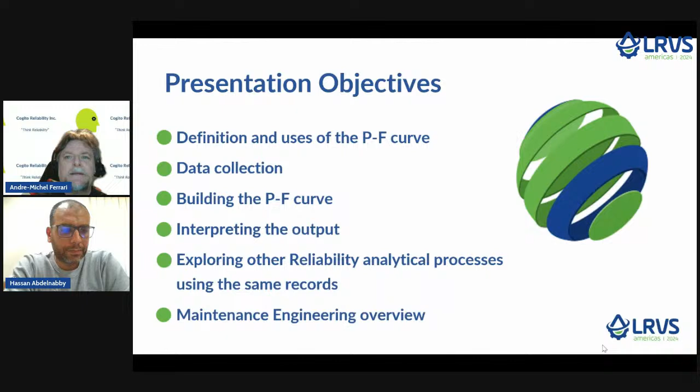In my past career, I've heard a lot about PF curves mentioned here and there, but I never saw how one was constructed. I really like to know what's under the hood before I drive a car. The PF curve is essentially a graph showing specific points corresponding to the health deterioration of a component over its lifetime. It represents the normal process of aging, like for us humans - we age over time, our health deteriorates, and there are specific indications of deterioration we can find over time.

Have you ever heard a doctor say, based on their diagnostic, this particular patient has 5 years left to live? This is essentially what a PF curve does based on a specific diagnosis criteria, for example a vibration spike. Then we can estimate the life before a failure occurs.

In a PF curve, the P stands for potential failure - for example, the bearing is vibrating but still running, but it might fail in the future. F stands for complete failure - the bearing has failed and cannot perform its intended function anymore. The interval between the P and the F is the time we use to plan for mitigation or repairs.

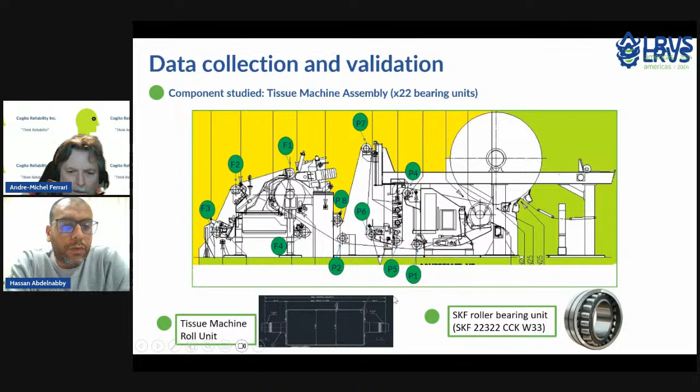In order to make the study as simple as possible, to help us show you how we can build the PF curve, we selected 11 rolls which have identical bearings in type and size. In this study, we will focus only on the bearing defect. Next slide, please.

In our study, we started the machine - the mill started in 2008. We tried to gather reliable and valid data, so we used data from our SAP system, which was implemented in our factory in 2015. We also used the maintenance log to get the F point, the fail point, and we used the vibration analysis program to come out with vibration records that we use to generate the P point. We only used 4 points because they are considered at or above our acceptable threshold.

As for the vibration threshold, we are guided by ISO 10816, currently 20816, and we will talk a little bit more about this in the next slide.

So, vibration analysis of the bearing. The bearing has 4 stages. For us, stage 1 and 2 are very difficult to see actual damage on the bearing - it's all about subsurface cracks. We only consider these 2 stages to make sure the bearing is already available in our store, or we are in progress to purchase the bearing.

We are focused on stage 3. In stage 3, you can see actual damage on the bearing, and you need to remove it before it reaches stage 4, because at stage 4 the behavior of the bearing can be unpredictable and it can fail anytime. Every stage has its own symptoms, and we follow all of that, and also monitor the vibration level to make sure it does not exceed the acceptable level of the ISO.

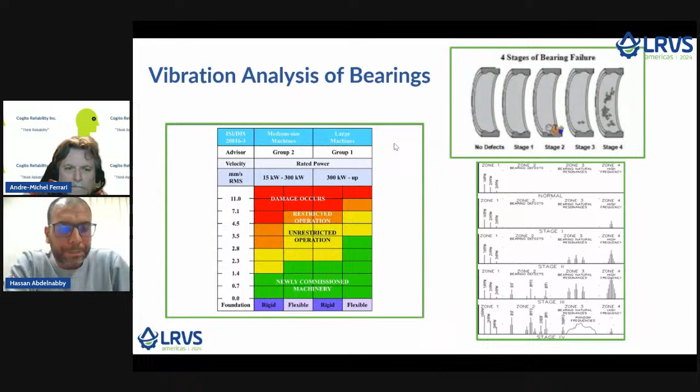Vibration analysis of the bearing is a complex process, but I want to make it as short as possible. We monitor the vibration parameters - acceleration, velocity, or displacement - and see if there is any change in these values. Industry knows that if it increases 20%, you need to look at it in more depth and detail. So if it increases, we look at spectrum analysis and time wave analysis to find the symptom of the bearing defect. All of that helps us build the baseline and set up the alarm level, which helps us reduce the amount of analysis.

Also, if we are in doubt, we compare these values with another similar equipment. All of this is done to make sure that when we say the bearing needs to be changed, we are giving the actual judgment. After all, condition monitoring - vibration analysis is a condition monitoring technique, so we monitor the condition all the time.

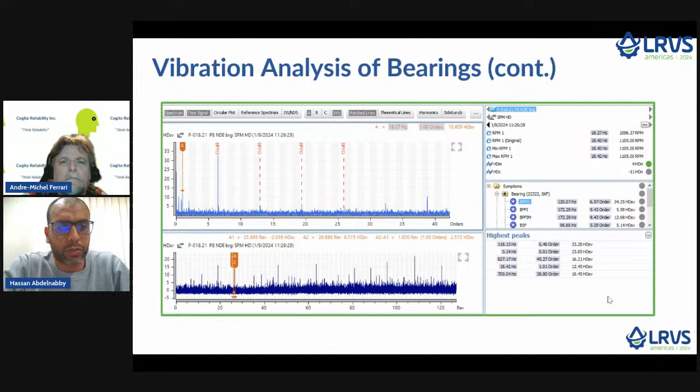This is an actual image of the software we have, but this is a shock pulse technique - another technique we use to give us a pre-warning even before vibration. As you can see, we can detect the bearing failure, and also monitor the change in amount of vibration. We use SPM to give us a pre-warning, because maybe a bearing has a long lead time, and we need to start working on it even earlier than the normal PF curve.

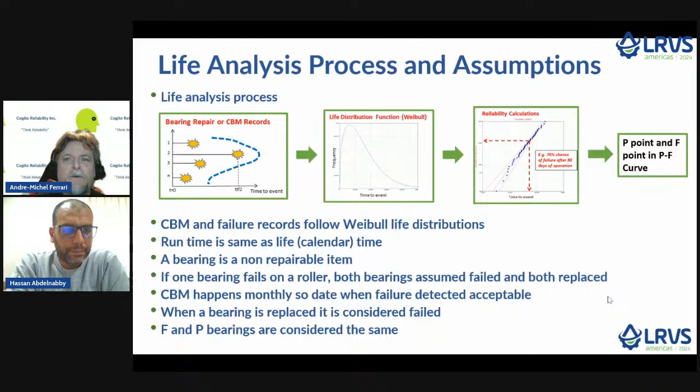Once we have defined this distribution in the middle, we can do various calculations - I put an example here, such as probability of failure in this case. This process will eventually provide us with the P and F points for the PF curve. The assumptions are all listed below, and they are important to ensure that the study is rigorous and well conducted.

Moving on, using this process highlighted earlier, we have literally modeled how a typical SKF bearing in our sample is expected to deteriorate or fail over its lifetime. This slide represents the probability of achieving each point after a specific time interval. We have two sets of data, P and F, so we have two models shown in this slide. We have highlighted in the little box in each graph the Weibull distribution parameters eta and beta, which characterize the distributions for each category. Those parameters are crucial and unique to the model and will help us define the PF point.

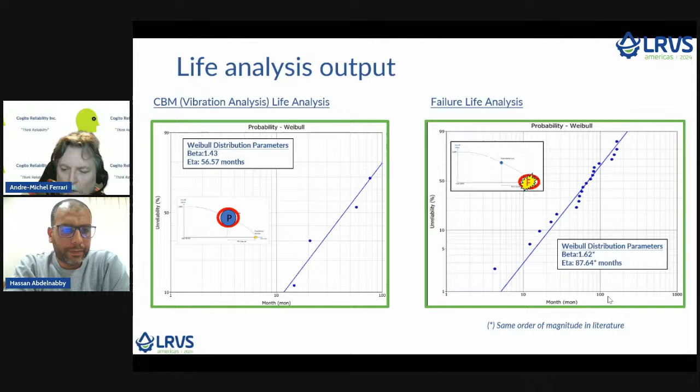Moving on. So finally, here we are. We are ready to build a PF curve. We use the scale parameter, or eta value, which we obtained earlier.

This parameter corresponds to the expected time to see a specific condition of failure. The expected time to see the first P point, where the high vibration threshold is reached, is around 57 months after the new bearing is installed. The expected time to see the failure point, the F point, is around 88 months after installation. The difference between those two points, as shown on the graph, is 31 months, or 2.6 years. This value is your PF interval.

Moving on, let's see how we can interpret the results in a practical way. What does this mean for someone like Hassan, who's going to operate and maintain the equipment? What we get from this study is a PF interval. We did not really focus on the vertical axis, which is the health of the equipment. We focus more on the horizontal part, which is the elapsed time, or lifetime.

We now know that if we hit the P point, we have 31 months to do something about it before the bearing fails. In other words, at the P point the bearing is still functioning, but it is in a degraded state. Nothing has failed yet.

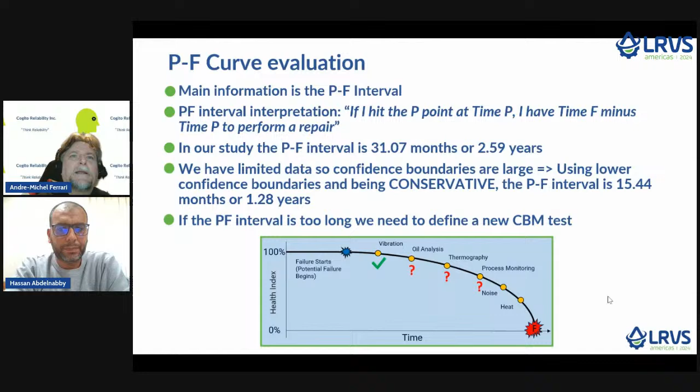Once we have defined this threshold, we would need to gather all the records and timestamps of those threshold occurrences after each bearing installed. The rest is exactly the same. The F point stays the same unless we have new data about failures, and we can refine our model. So moving on, let's look a little bit further in the analysis, it's a busy slide, I'm sorry.

We did all this work, we have all those records, we crunched the numbers, and we got only one value, which is the PF interval. Can we get more from the analysis? The answer is yes, but now we have to throw in another variable, which is cost. That is, money spent doing maintenance or inspections.

Hassan does vibration inspection monthly at a cost of one US dollar per bearing per vibration check. So he does it monthly at a cost of $1. This is low according to North American standards, but this is what it is.

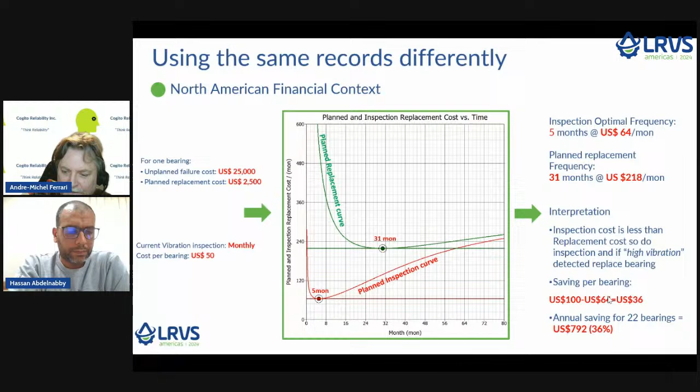Just to conclude here, our PF curve now comes a bit like a Christmas tree where we're adding decorations to it based on the optimized calculations we did on the previous slides. We now add the recommended inspection schedules.

By taking the same data we use to build a PF curve and adding some cost information to it, we are able to refine our maintenance strategy.

I've talked a lot now, but before I pass the microphone back to Hassan, I'd just like to make some concluding remarks on the reliability study. As shown earlier, the PF curve provides good information, but it's limited to the PF interval.

So it would be great to take the same records we used to do the PF curve, and add the cost information to it in order to get an improved maintenance strategy, as we showed earlier. Just a little teaser here with the information we have.

We can even go further and build a reliability block diagram, but that's another presentation for the future. It shows you how reliability engineering can be versatile, beneficial, and fun. We had lots of fun with Hassan.

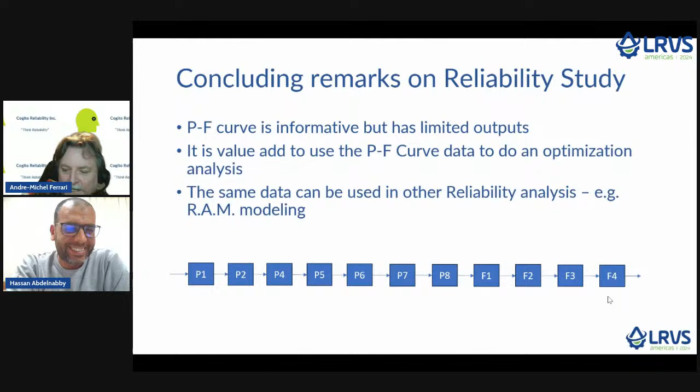Thanks, Andre. So, maintenance engineering review. First of all, you need to monitor your performance. You need to keep record of failure times, mean time between failure, mean time to repair, and machine availability. All of that, you need to analyze your performance in order to find the improvement points in your department.

So, we were able to build our case study because of the availability of data. If we don't have data, we will have nothing, and we will not be able to build anything. So, if you are not keeping record of your maintenance log now, start now.

And if you want to find the correct KPIs that you need to monitor, you can ask your peers in the industry, because every industry has its own KPIs. Of course, you can come to consultants who can help you build your KPIs, but you need to monitor your performance.

As for the PF curve, our conservative approach was 15 months. So 15 months for me as a maintenance engineer is important to have the time to plan the task.

You need the time to determine if the spare part needed is available or not. You also need to locate the resources and the manpower needed to perform this task.

So from my point of view, having a big or long PF interval is essential for correct behavior in your maintenance, because you want to perform all of that under the safety umbrella. If you have more time, you will have better time to plan and get a good result at the end of the day. Which brings us to the last remark on this slide.

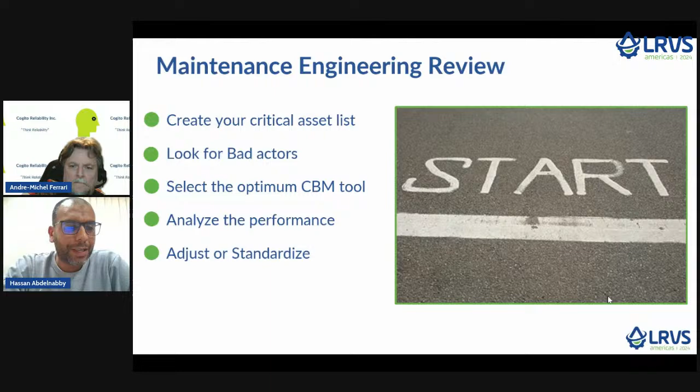So finally, I just want to thank Andre. It was a pleasure to work with you, my friend, and I hope we continue working together. Yeah, so thank you, Hassan.

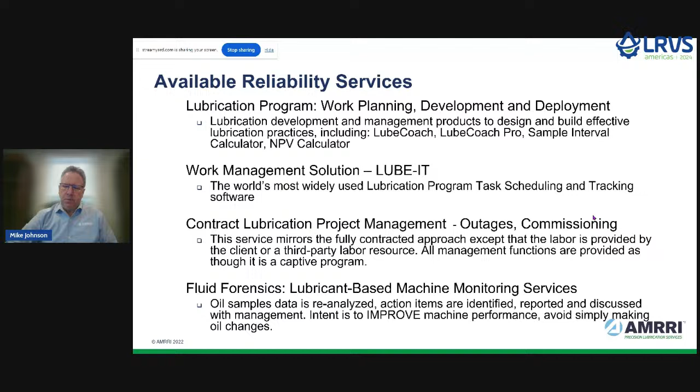We don't do that. Why is machine lubrication considered a pathway to improve financial stability? We've been told by the people that study our bearings and the dynamic film that supports the bearings, that floats the elements in the races, that our industrial world floats on a 10 micron film of oil. The better our research gets, the more we see we're not quite so lucky. The reality is we're floating our element bearings on a 0.5 to 1.5 micron film, and our journal bearings on a 3 to 10 micron thick oil film.

On one hand, that's extraordinary that it works, and it does work. On the other hand, realize we're trying to live our industrial livelihood on an oil film the thickness of a red blood cell. It's a precariously thin layer of protection. We recognize with our day in, day out activities that we have to do whatever's necessary to sustain that red blood cell thick layer of protection in order to protect productive capacity.

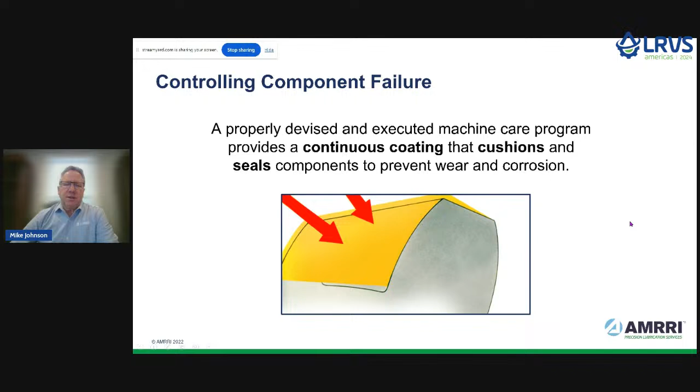If we lose our oil film, all of the effort we put into installation, alignment, and balance is lost. It's gone. So our day in, day out activities should be focused on doing whatever's necessary to preserve that precious oil film. When we lose that film, we suffer wear from surfaces rubbing, wear from contamination, wear debris and atmospheric contamination. Contamination leads to fatigue, we suffer wear from corrosion, and all of those things generate lost productive time.

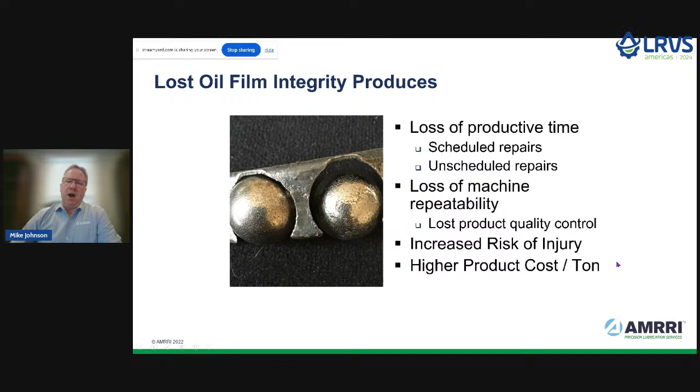And it doesn't really matter whether our repair activities are scheduled or unscheduled — once time is gone, it's gone. We lose machine repeatability, which impacts product quality. We have increased risk of injury, a higher cost of production per unit, whatever it might be, all of which contributes to lost competitive position for our company, for our enterprise.

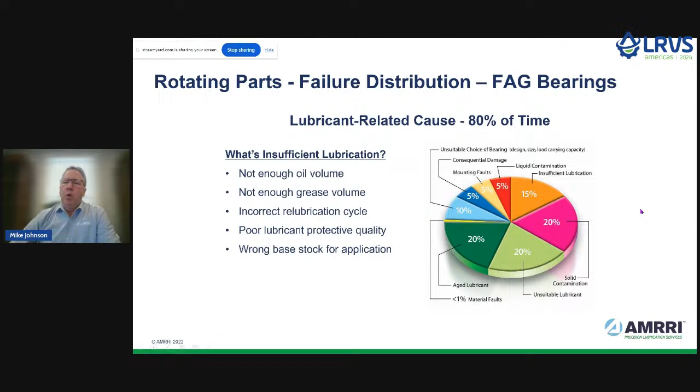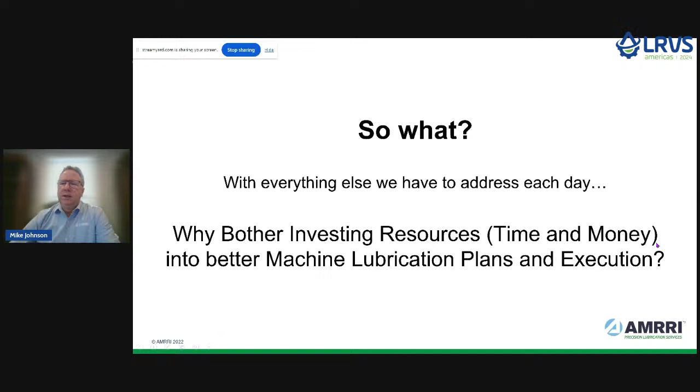So what? With all the things you have to do, why would you bother investing more effort, more money, more time into trying to address something you're already doing, but address it more effectively? Well, time is money. You've all heard that, I'm sure.

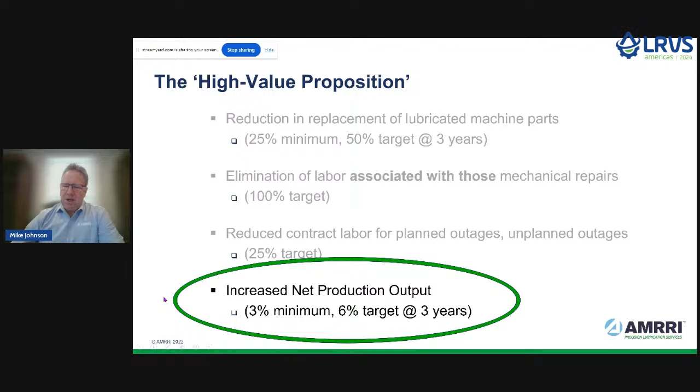What can you expect from deploying a more precise lubrication work plan, precise product selection, precise quantity, precise volume, precise contamination control, precise location? We'd expect reduction in replacement of lubricated machine parts. A reasonable target is 25% reduction, an ambitious target would be 50% in the frequency of repairs over a 3-year period. Elimination of labor associated with those repairs, any contract labor associated with them, and far more importantly, increased net production output. Regardless of the cost incurred to replace machine parts, that dollar value pales in comparison to the potential of increasing production output without adding new production machinery.

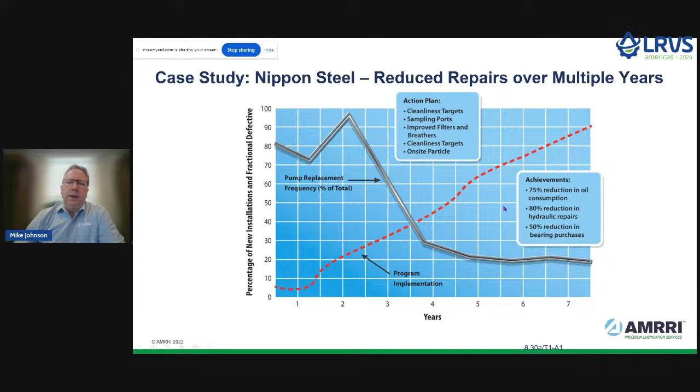Here's a similar chart showing an 8-year progression in pump replacement decline following implementation of contamination control. Another steel mill in Japan showing very similar results over a 5-year period.

I've done multiple cost analyses during benchmarking sessions at multiple facilities, and these numbers, the ROI and estimated savings over progressive years, net present value if you will, always turn out to be larger than expected. That's because our machinery, our livelihood, floats on an oil film that's the thickness of a red blood cell. Anything we can do to improve the effectiveness of that machine-saving film produces huge returns in terms of productivity and reduced cost.

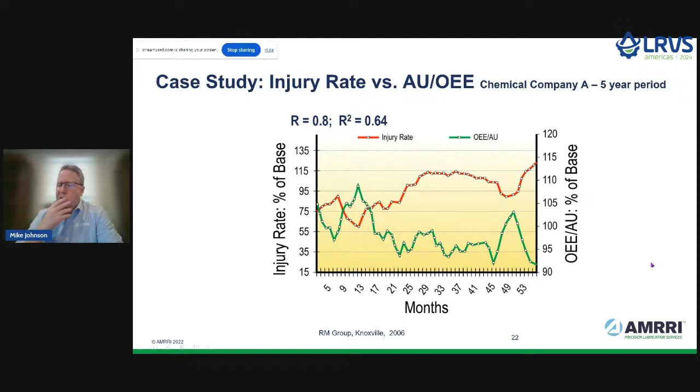There's a safety improvement element as well. Overall equipment effectiveness, an asset utilization measure over a 5-year period. This company showed that as their injury rate increased, their asset utilization decreased. It's a large French chemical company, a pretty healthy study showing a tangible safety benefit, even showing correlations between injury risk and PDM type work orders versus corrective work orders.

There's a lot of reasons we should focus on doing whatever we can to tune our lubrication program up to achieve the best possible outcome: right product, right volume, right frequency, right location, and the right attitude. As it is today, as you look at this presentation, your system, whatever you have in place, is perfectly designed to give you the results you are enjoying or not enjoying today. If you want different results, you have to have a different system.

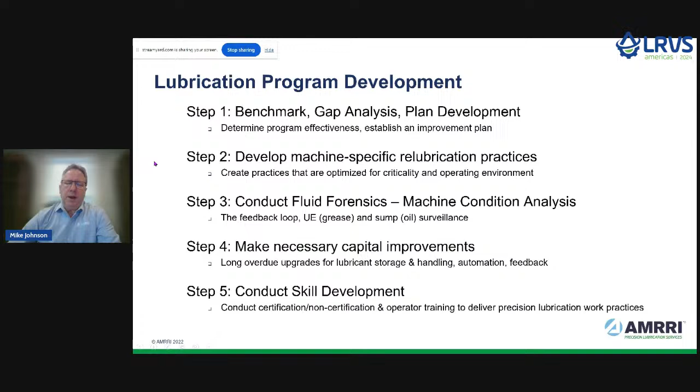So let's think about the system and how we go about achieving improvement in it. There are 5 key steps we would identify as systematic improvement steps. It starts with a hard, cold, objective measure of the current state of affairs as they are today. We often find when doing these benchmarks that customers lack the detail they believe they need and want for their lubrication program improvement activity. So let's focus on that piece.

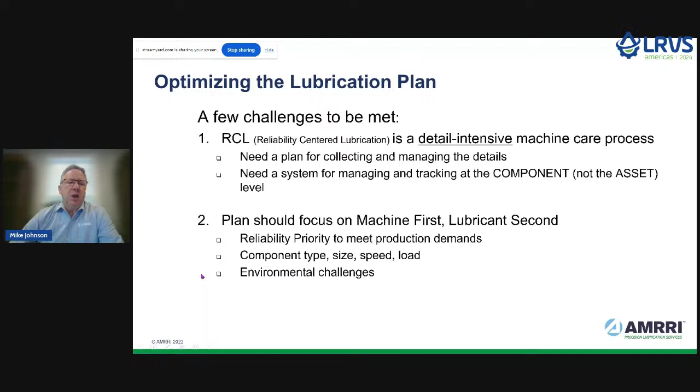A few challenges need to be met when you dig into the many details associated with machine lubrication. Reliability centered lubrication is detail intensive, so you have to have a plan to organize and manage the details. Secondly, we've become accustomed to leaning heavily on our lubricant providers to tell us what the right answers ought to be. But lubricant providers' job is to sell products. Having come from that world many years ago, there's constant pressure to sell another product. That plan focuses on more lubricants in your plant site, where your plan should instead focus on machine reliability, starting with your most critical assets and focusing on those areas that have the most vigorous challenge to operations.

What kind of details do we need to consider? Well, labor is a very important part. We need a thorough understanding of what our weekly labor requirement is going to be, such that we can plan our annual labor requirements. It's not difficult to do this, but it does take having the right details in hand. Consider a critical process pump.

We've got to have a plan for the motor bearing lubrication, drive side and non-drive side, a separate plan for the coupling if there is a lubricated coupling, and a separate plan for the driven machine part. Each component requires a plan, organized so the work can be executed efficiently. We do have software tools, plenty of them, that give us the means to do that.

When considering a critical pump, we need a plan that tells us how much labor will be required for that one pump. If we've got 1,000 pumps, we multiply that annual plan by 1,000 to account for that particular machine type.

So we have 4 visits typically to lubricate the motor over the year, 2 visits to address the coupling, 52 visits for a level check unless we're using automation to control levels. Maybe if it's an important enough pump and we're doing sampling, 4 visits to do samples and 1 visit hypothetically to do an oil change. We could conceivably measure 63 visits by a technician.

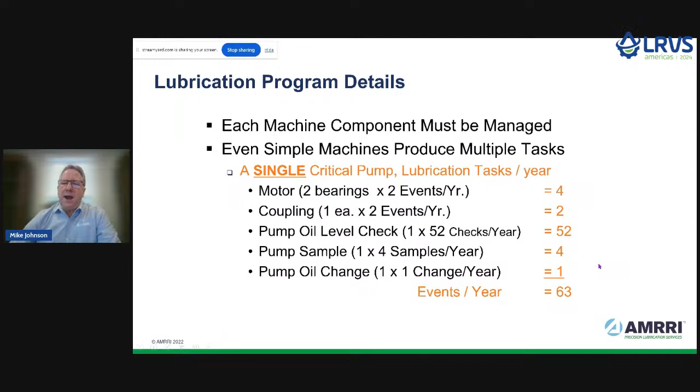We need to timestamp each one of these tasks, multiply out the timestamp per task by the number of visits to give us an annual requirement for that pump. And the same with other machine types.

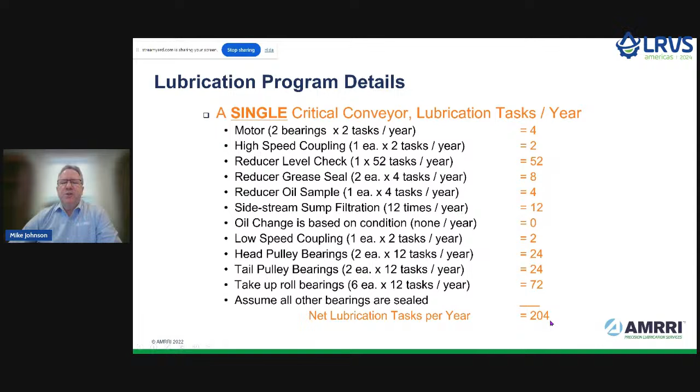A direct coupled fan, for instance, running the same exercise, we may find 30 visits, based upon the size of the bearing supporting the shaft and the speed it's turning—this may be more, this may be less. A critical conveyor has a lot more parts to attend to and a lot more tasks or visits to each component to address the things that must be addressed to float the component's parts.

So we line up all of the tasks. We see that even a relatively small production site produces a very large number of tasks.

We're pretty good at keeping up with the details in our maintenance departments, but at some point you have to concede that a technician or two technicians working together are probably not going to be able to remember 39,422 tasks in a small production cell.

The devil is in the details on our machine lubrication work plans. So to get those details in the right shape, we're going to devise a plan that puts our weekly work activities into routes where each task is addressed.

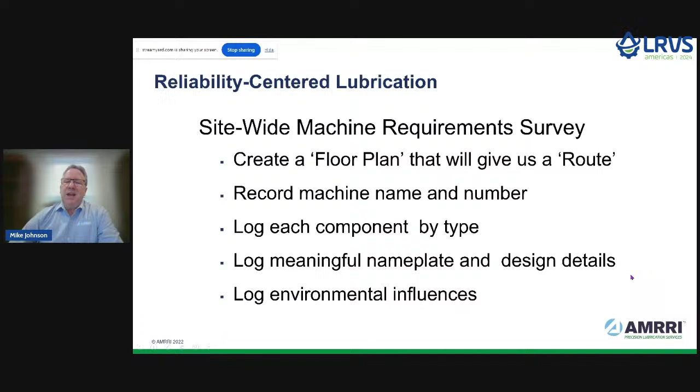We're going to record machine name and number, log the types, any other meaningful design details and environmental influences. You should build a map that shows where all of your assets are with respect to tanks, walls, motor control centers, and what have you.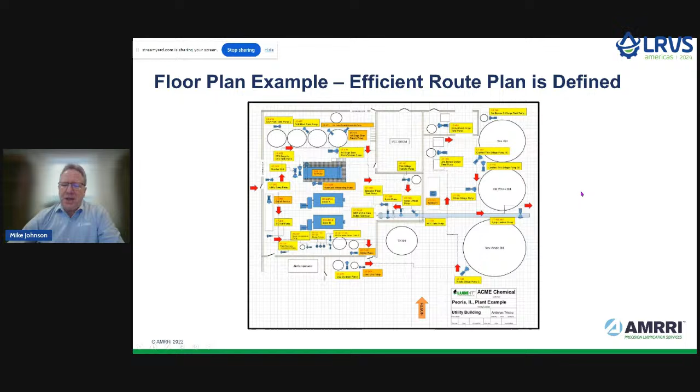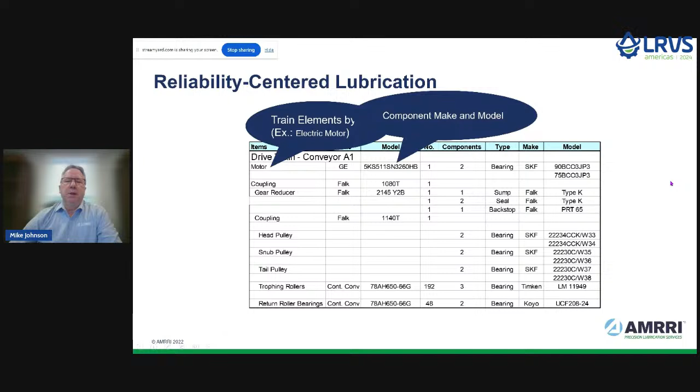This is the route. Once the route is defined, we go back to the machine and record details about the individual components, and there's a lot of details to be recorded: the motor, who made it, the model, the number of motors, the number of components, the fact that it's a bearing, the type of bearing—SKF, ball bearing, deep groove ball bearing—it's noted here, and similar levels of detail for every lubricated machine part.

None of these detail collection bits are complex, but it is time consuming. And if we want a machine lubrication program that supports that red blood cell thick layer of protection, and we want it to be right, we have to have the details in order to build that plan.

The environmental characteristics are also particularly important. The more aggressive the production environment, the more frequently we should be working our inspections and applications.

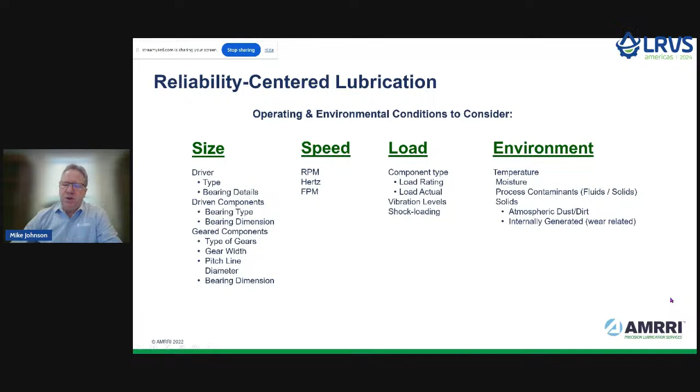The information we're going to use to build this plan comes from a variety of sources, including standardized procedures—ASTM, ISO, DIN standard procedures—and other generally recognized engineering application definitions. Let's take a quick look at what that looks like.

We'll start with bearings, and we'll start with electric motor bearings. Come on, slide—there. We'll start with electric motor bearings.

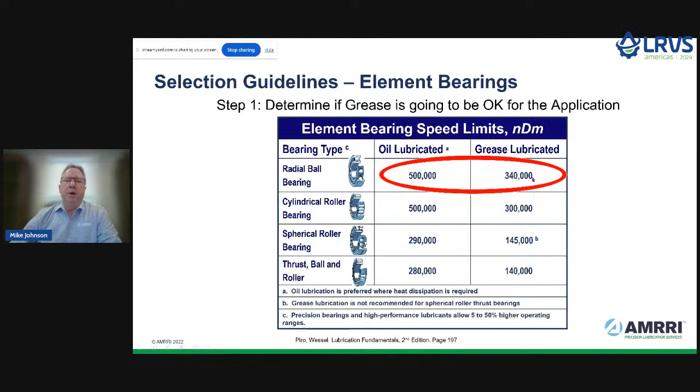We'll look at the nameplate and identify the bearing descriptor number—this is an ISO or DIN standard number. We can identify that it's a ball bearing. We know there is a limit to which grease will function well in a ball bearing, so we're going to figure out whether this particular ball bearing falls above or below this speed. It's a simple calculation.

ID of the bearing plus OD of the bearing, divided by 2, times the shaft speed gives us specific values. Once we know the value, we compare it for the inboard or load side and the non-load side bearing to our limit for grease effectiveness, and we get a straight up answer: grease is going to be a good fit for this component.

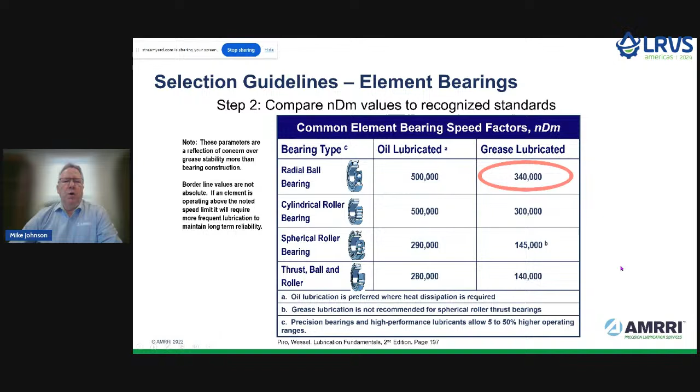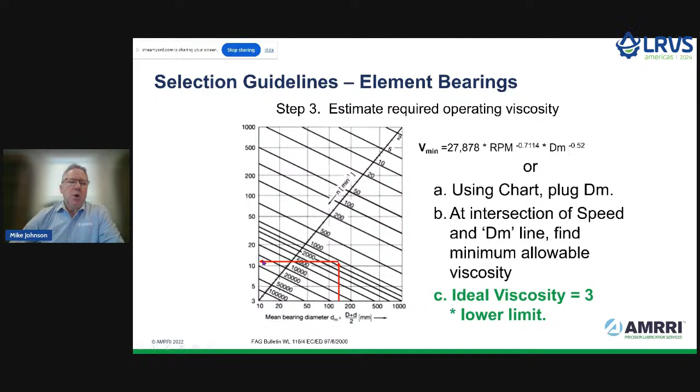The next question is how thick does the oil from the grease need to be at operating temperature to give us the means to float that element? That's a simple calculation. We can either drop the details into a calculator, or go to our bearing manufacturer's lubrication guide and plot the same details onto a chart like this. We come up with a drop dead point, whatever that number, whether it's plotted or calculated, multiplied by 3.

In this instance, for this bearing set, we're looking at a drop dead of 15.2 centistoke viscosity at operating temperature. Multiplied by 3 gives us a target, so we're going to try to find a grease that gets us to 45.6 centistokes at operating temperature. The operating temperature is 50 degrees C. We look at a product that's got an ISO viscosity grade of 100 that we're using on motors at 50 C. That viscosity grade of 100 gives us 60 centistoke of working viscosity. We said we wanted to have 45.6 - that would be ideal. As it turns out, the product we're using would be ideal, and we move on to the next step.

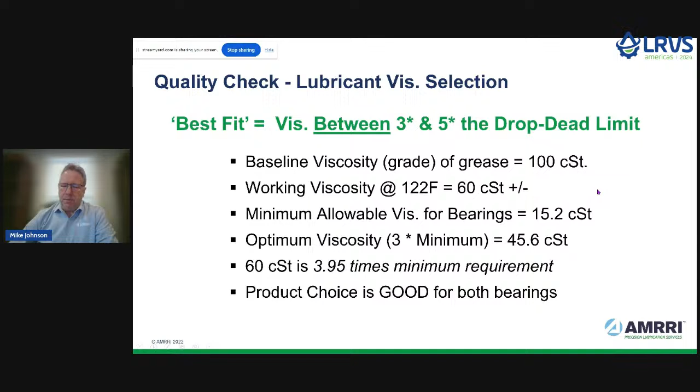When calculating the viscosity requirement, we want to get to a space between 3 and 5 times that drop dead value. That is obviously greatly influenced by the operating temperature of the bearing, so we also need to know the operating temperature of our bearings and other lubricated machine parts when we're designing a program. Step 6 is about lubricant selection.

Bearing manufacturers along the way have said it would be better if you're not using EP formulated products. EP attributes by design are somewhat corrosive, and can particularly attack soft metal surfaces. If we don't need EP formulated greases, we shouldn't use them. The drop dead viscosity value is the break point that tells us whether or not we should use EP products. In this instance, we picked a product that puts us out here just above 3 times the drop dead point, so we don't need EP formulated products to be able to expect to protect the bearing surfaces.

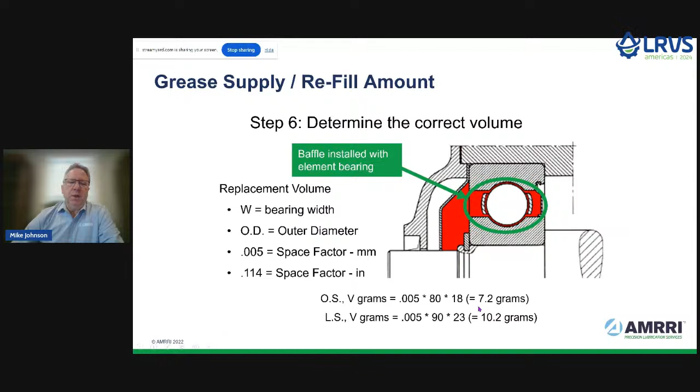The 6th point would be one of volume. It's a simple calculation. We want to fill the space that exists between the axial planes and the vacant space around the element. We calculate that 0.005 times the outer diameter of the bearing times the width of the bearing gives us a value in grams. That's a simple formula - it works on all types of bearings. This is the correct volume defined.

And then we can verify that with different tools. We can put in the precise amount if we have the right equipment. Using ultrasonic energy testing, we can even demonstrate that we need more or less dynamically.

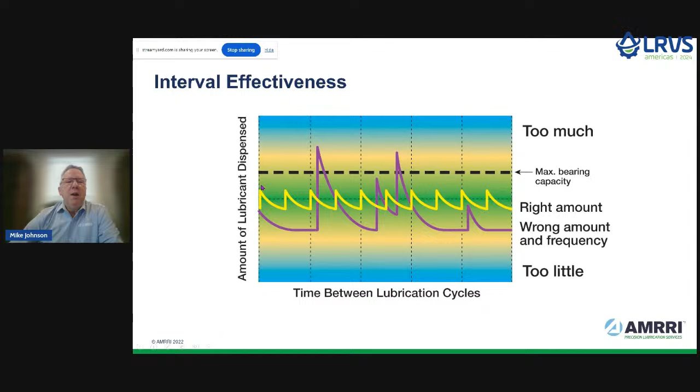The last point is about the frequency. Now, if we need more grease in a bearing, we should adjust the frequency to get there. Within a few seconds of supplying the grease to the component, all of the fresh grease will have flushed out the race faces, and now it's sitting on the sideline. If we need more grease over the course of the working duration, then we need to take our big interval and chop it up into smaller pieces. All of our bearings would really rather be lubricated with oil, but we can approach that kind of attribute using grease if we are planning and scheduling the right frequencies.

Here's a formula that can be used to determine a frequency. It is modified by the K value, which is the environmental conditions around the operation, the speed, the bearing temperature, the contaminant load, the moisture load, presence of shock loading, whether it's a horizontal or vertical axis shaft, and then the bearing type itself - all factor in to determining how frequently we ought to be lubricating the machine parts. None of these details are complex, but they all need to be captured and factored in if we want to have a precise lubrication work plan.

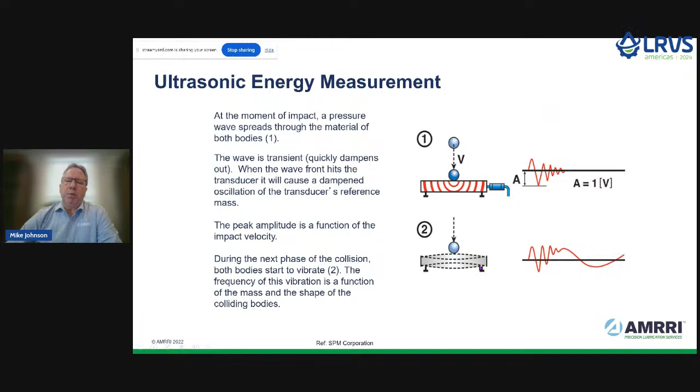Along the way, including from the previous discussion, we heard consideration about condition monitoring as a means - lubricant condition monitoring versus vibration-based bearing condition monitoring. Well, an option for our grease lubricated components is ultrasound measurement. Ultrasound measures contact energy. It's a much higher frequency than vibration energy, which measures the movement, not the contact. Ultrasound tells us when the asperities are beginning to bump and collide, and if we have high decibel values, that means our bearing surfaces are approaching a dry state.

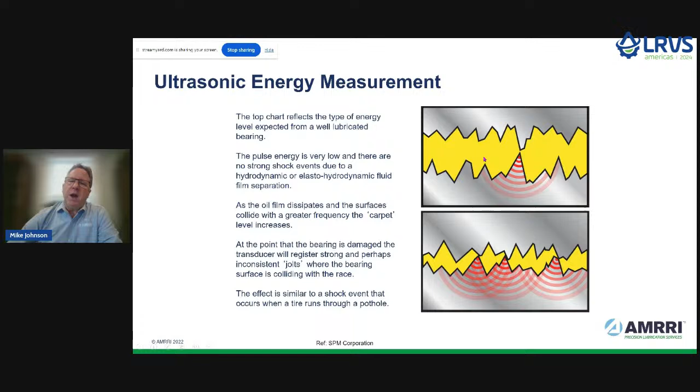When we lubricate, we refloat the surfaces, the decibel value declines, consistent with less contact energy, and we're able to use this to effectively control volume being supplied for each component.

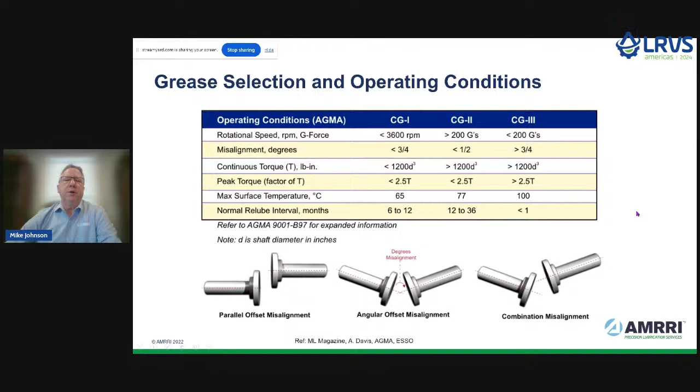There's rules for bearings, there's rules for couplings. Different kinds of couplings have different centrifugal force values related to the operation of the coupling. Different greases would be applied based upon the degree of centrifugal force loading on the grease. It's all fairly well objectively definable—grease characteristics for those three different types of greases. We need to pick the right type of grease to match up with the coupling's operating conditions.

There's rules for gear drives. And whether it's bearings, couplings, or gear drives, all rules ultimately boil down to speed and size of the machine part. The pitch line velocity determines the required working viscosity for a given gear wheel in a gearbox. We know the pitch line velocity, which is a calculated value: pitch diameter in millimeters times the speed of that wheel, divided by 19098. And if we know the temperature of the oil in the machine, then we can clearly identify the best fit lubricant that fits that speed at that temperature.

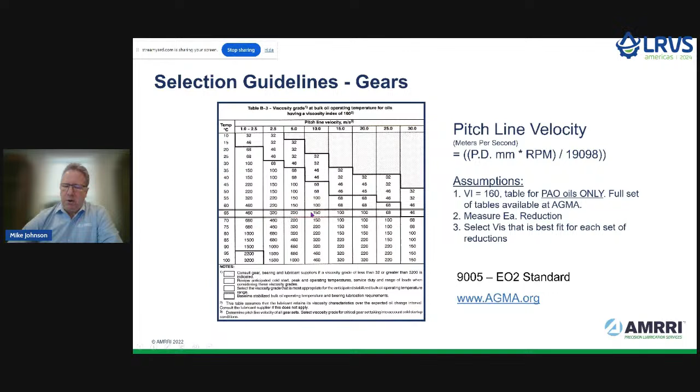Very objectively definable. Fortunately, our gearbox manufacturers have done a good job of defining this and putting information on nameplates that go on our gear drives. They've done that for us.

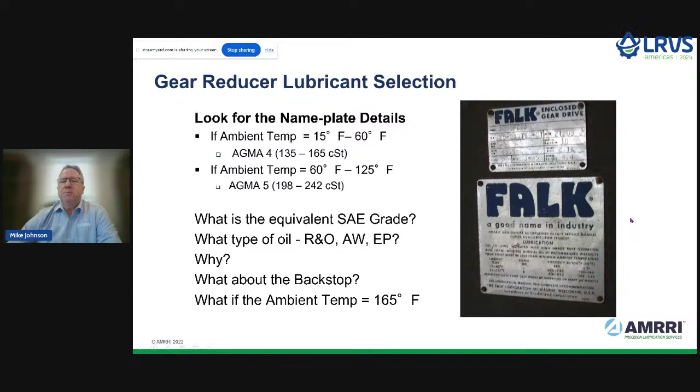The gearbox manufacturers many years ago began putting the correct product definition according to an operating temperature range on their machines. All we've got to do is go look at the machine, get the correct temperature and/or the ambient temperature, and match up what the lubricant supplier is providing, or the technical spec for the machine itself.

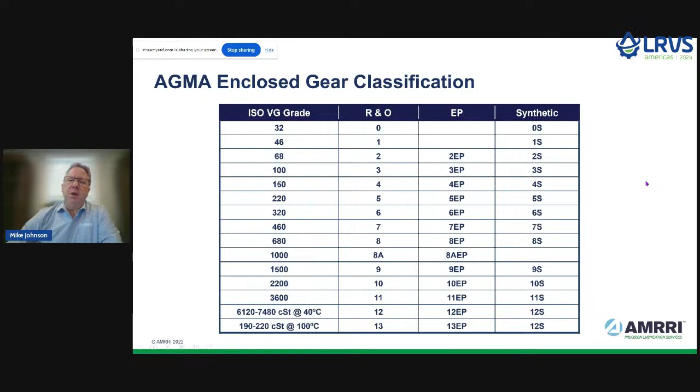Gearbox manufacturers use nomenclature for lubricant definition that's similar to what the rest of industry uses, slightly different, but the match is easily made. So regardless of the component, we've got some calculations that we need to do to come up with the objectively defined best possible plan for all of our machine parts.

Now we might well conclude, yeah, we don't have enough money in our budget to do that for all machines. Well, that's fine—focus on the top 20% critical assets. Those are your bread and butter and safety concerned assets. Focus on those, build the plan, live it for a year, two years, three years. Begin to enjoy the benefit of that plan and see how it works out, and then transfer that well-defined, precise lubrication plan to other assets.

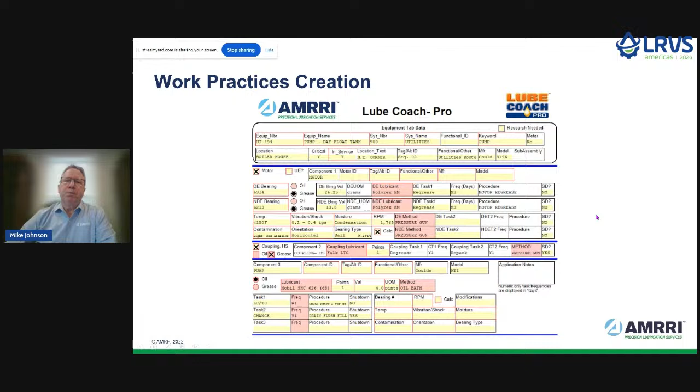There are tools that assist with the aggregation of the details. This tool called Lube Coach Pro is useful for getting all of the machine details together in one spot that gives you, the user, the means to produce an output that represents a rigorously defined lubrication plan.

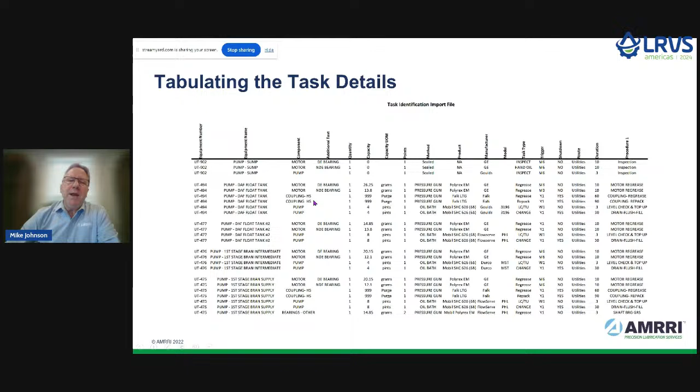From there, it is tempting to try to put all of this information into conventional CMMS programs. We have many: JD Edwards, Maximo, SAP—well-known, excellent programs, excellent software, but those programs do not provide spaces for these details. So as it turns out with conventional CMMS, you're writing up individual work plans based upon text scripts.

Go find yourself a task management system that gives you the means to organize your tasks in that linear sequence that you've defined. And then when you schedule that particular production department, you have the tasks that are due for the week that are all assignable and trackable. And if you pick a system that gives you this feature, you might even be able to recycle tasks that were simply identified as incomplete without any extra effort.

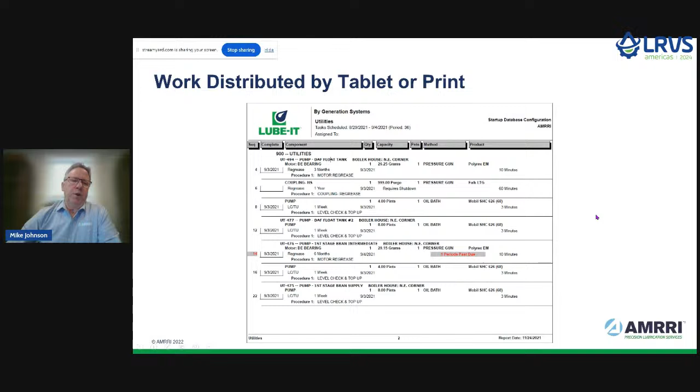Here's an example of a written output. Mostly people today are using tablets to keep up with and record the completion of these details, and that's the smart approach.

Your task management software should also, because all the details are based upon data fields, give you the means to generate rich reports on important things like what percentage of the task did we get done this week, how were we doing for this month in completing tasks on the first schedule. Now we should be at 90% task completion, and if we can't get there for a given route, then we need to move tasks around to other people, redistribute the workload so we can consistently hit 90% of task completion.

You might want to track lubricant consumption. How do we control cost if we don't know where the cost is incurred?

Anything that is within your system can be turned into a query and output. And with the benefit of our business intelligence systems today, that information can roll right out the front gate electronically up to the corporate office. And now we're not fielding phone calls every time we turn around either.

Without a quality plan to manage the many details, and a real, true process for getting those details accomplished each week, we are likely to drown in the complexity of our machine set of lubricated machine parts. We need a plan. A good plan will provide us the means to govern our work practices and control mechanical reliability of all lubricated machine parts. There's always room for improvement as well.

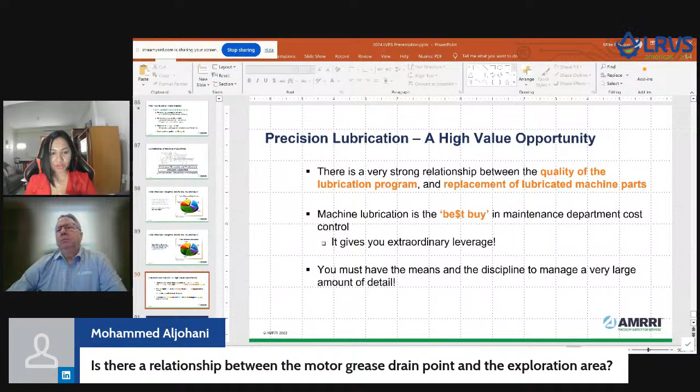So I'm just gonna have to jump in a little bit because we're almost at the closing time, and I know we had just one question. So we had one person, Mohammed, asking if there was a relationship between the motor grease drain point and the exploration area. So I'm just gonna bring that up on the screen here to help us a bit. Is there a relationship between motor grease drain point and the exploration area? Because we were talking about the exploration area in terms of determining where we could get that perfect grease point, and trying to figure that part out. So can you help us with that?

There's a misnomer about drain. The grease that goes into the motor is going to stay in the motor 9 times out of 10, regardless of how much grease you attempt to push into the motor for flushing purposes. You're not going to get any grease out. So that excess grease is going into the stator cavity and will corrupt your motor. I'm not sure what exploration area, I'm not sure what we're leaning on there.

Sonia, if you could provide him with my email address, we can beat on this more thoroughly. Definitely, because that was one of the main questions that we had there. And I know that, just from the information that you shared, very detailed, very interesting things. We always need to be able to calculate the right grease that we're using, because half of the times we're not using the right grease or the right viscosity. Yeah, suited for our temperature, suited for our operations. So I'm so glad that you were able to share that with us today, Mike. Yes, ma'am. I appreciate so much, thank you for taking the time to visit with us and share that information.

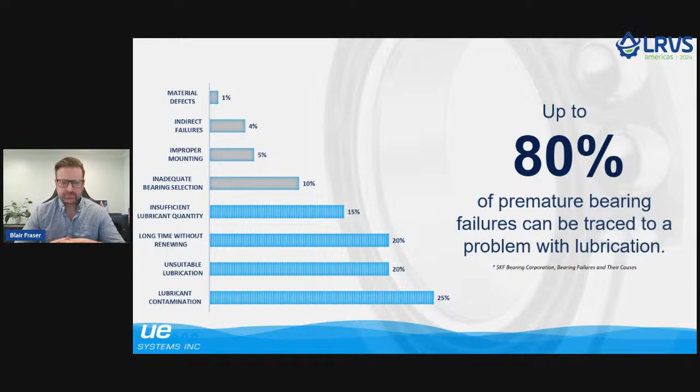And when you look at these studies, this is just one study for reference. I'm sure Mike and the team would agree with these findings, not necessarily the exact percentages, but really what we're looking at is, it's not just the right grease. It's contaminant free. It's getting there at the right time. And traditionally, as we look through this evolution, we have built technology to address one or two of the failure modes or failure mechanisms within the premature bearing failure, but we never created technology that addressed all four.

And that is likely why, still to this date, we have challenges. We have plants and facilities that are still experiencing premature bearing failure, even though they have put the latest technology in. It's because it wasn't addressing everything.

Really, when we look at the evolution of bearing technology, from going around with a manual grease gun to where we are today with autonomous remote condition-based lubrication, it's addressing all four of these failure modes in one solution. So as we look towards this, this is the evolution in Blair's eyes. It's not chronologically correct, there are some challenges to go through here, but I think you're going to start to see the evolution is what has happened over time, and I'm going to describe it as I know it.

Now, I've been in this industry a little bit longer than I want to admit. I can't believe how much time has gone past. I actually started my career on the plant floor lubricating equipment, and I often say I need to go back to those employers and apologize. I'm not going to give them money back, but I guarantee now that I know I inadvertently caused premature bearing failure. Likely those employers didn't experience those failures because I moved on to a different job, but I really need to go back and say something to them.

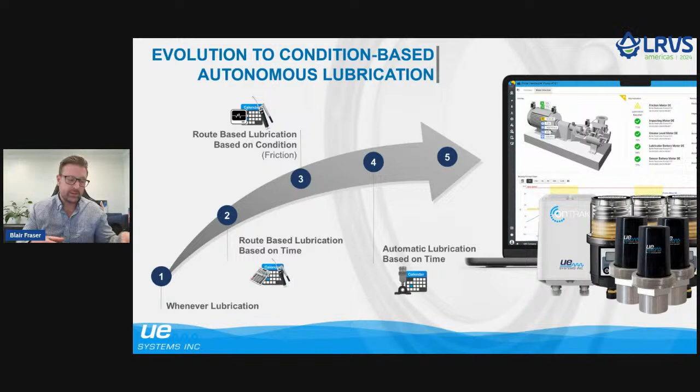And as I said, 3 and 4 really came out together. As we shift to autonomous condition-based lubrication, it's really combining 3 and 4 together to make a solution that addresses those 4 failure modes of premature bearing failure. So we're really combining technology that existed into one solution.

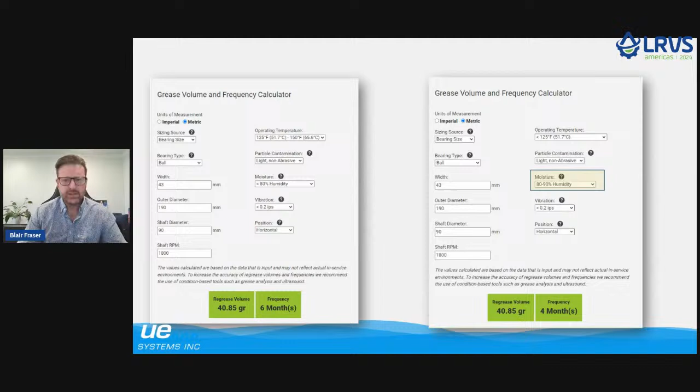That interval went from 6 months to 4 months because of one slight change. And obviously there's no operating context, this is a hypothetical situation, but you can see the variability that's going to happen. So while we got good at a calculator, we got good at walking around with the grease gun, they're still subject to change around the variability in the way we operate, maintain, and where we place our assets. So definitely a challenge from that point.

So we tried to solve this. As we were trying to develop this next evolution of technology, we met with hundreds of customers and asked, hey, what do you like about single point lubricators or distribution systems? What do you not like? And really I got two answers. One is, I've used them.

You can go grab them, they're out in the garbage bin. Or two, we use them because it's the lesser of two evils. One of those situations where it's just unsafe to put a human in to lubricate, or it's enclosed from guarding, those type of things where it's really the only thing we do. We'll never put a human in jeopardy, or we're resource limited. And even if these fail, it's better than us not doing it at all. And I agree with that.

This is just an image off the internet when I looked up, hey, common single point lubricator failure modes, and this image came up. I think this is great, because what we've seen is this lubrication device is meant to be autonomous. It's meant to lubricate based on the time you put into it. But we often find people went in and put...

...preventative maintenance tasks, so time-based tasks, to go check and make sure things are okay. And I can't tell you how many times, and I have some videos, unfortunately I can't share them, of lubricators on the ground. I have one that was completely full of water. It looks like it went into a pool and they put it back in there. So obviously the LCD wasn't lit up and things like that. So that's some of the challenge you have with these devices.

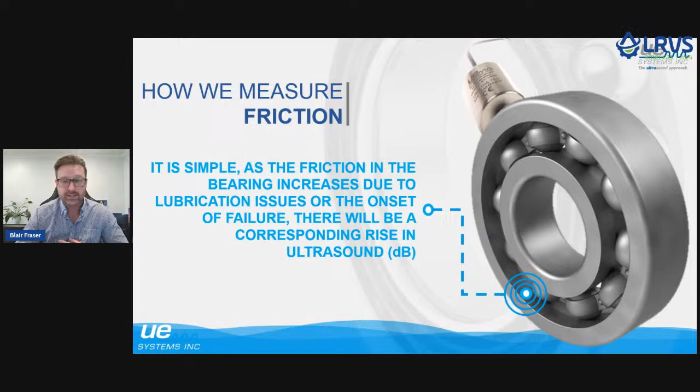As we start to add grease, we start to reduce that friction. As we over grease it, because we're getting that hydrodynamic effect and overfilling, those rolling elements have to push against the existing grease that's in there, creating friction, and we start to go up. So with this technology, we can start to look at not just under grease, but over grease as well. Essentially what we're able to do with this technology and autonomous condition-based lubrication is really play a game of where we are at. We've gamified that Stribeck curve.

I'm going to play a video that gives you an idea of condition-based lubrication, but done manually. Even with this technology, there are things that are not ideal from the best practice. So what I'm going to do is, this is our Ultra Probe 15,000, actually our later model. The gentleman behind there is applying grease. We don't know this asset, don't know the context of it. But as you look at this, you can see the starting friction of this bearing is around 57 decibels.

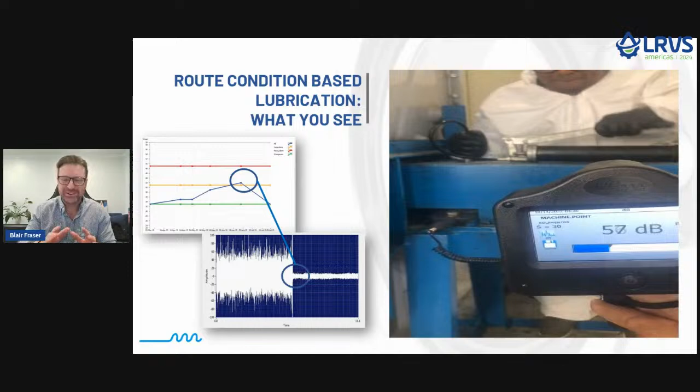So grease is getting applied. One thing, and I think it was Mike that might have mentioned it, is overgreasing isn't just too much grease—the rate at which you apply grease is also very, very important. Every time I watch this, I get a little nervous about that. I don't know the context, but there's a lot of grease going in in a small amount of time. So if you look at that decibel level, it dropped down to 42, 43.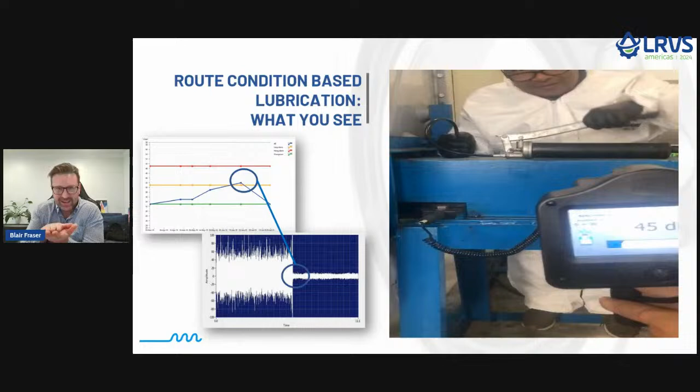That's what we call the aha moment. We went down that Stribeck curve as we added grease. I feel like I should yell stop to this person every time I see this video. I'm just going to make myself feel better saying they did this for educational purposes, but I don't know if that's true. As you see, he still applied some grease, and we started going back to the right side of that Stribeck curve. So even with condition-based lubrication, there's still a human in the loop part of it.

As we look at what an autonomous lubrication system looks like, well, we need a lubricator—we need a lubricator to put grease into the bearing, right? That takes the human out of the loop. No longer do we have to go out there and squeeze a grease gun. Not saying this applies to every bearing in your facility, but what we're really looking at is a lubricator that can, when called for, has the smarts. So it can tell us its grease level, can tell us if there's back pressure building up in the bearing itself. If you mount this 20 feet away and use a grease line to bring it in, are there any blockages? Those are the things we need to give us trust back into these systems.

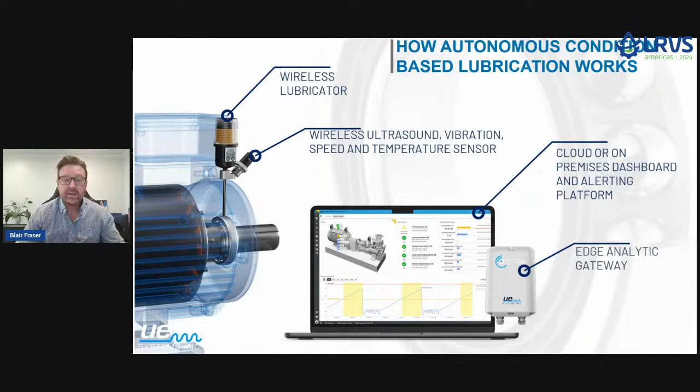And then we need a sensor—we need a sensor to measure that friction level, and also look at it from another point of view, other failure modes that may happen other than lubrication. We need a place to bring that data to and look at it, and we need a way to get that data digested from the site into the cloud. That's the technology evolution we're talking about, replacing a person, a calendar, and a calculator with this.

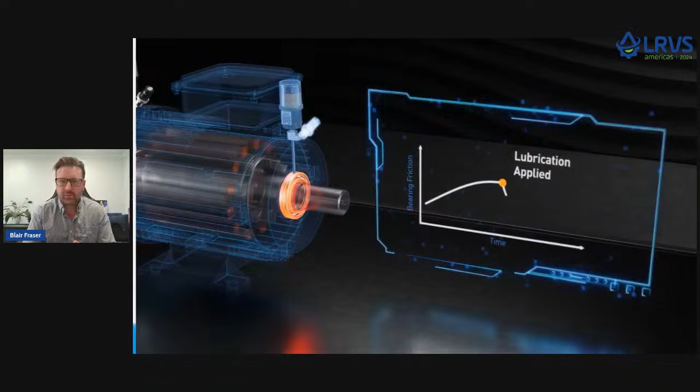So as we look at what's happening here, as that bearing is rotating, it starts to need grease. We're exaggerating this with the bearing looking like it's red hot, but there are ISO limits—it's not like we're picking a spot on a dartboard saying I think it needs grease around this point. There are some changes needed based on operating context, if it's on, off, or very, very slow speed, less than 100 RPM—we will customize those alerts. But really what it's going to do is apply grease automatically on our behalf, very, very slowly.

So if you saw the video previously, the gentleman was adding grease a little bit aggressively, in my opinion. I don't know the context of this bearing, but if you have to lubricate 50 bearings in that shift, you're going to want to move quickly. With an autonomous condition-based lubrication system, you need to look at the methodology of how it's applying grease, how it's measuring friction while grease is applied, so we know if it needs to continue greasing.

This is an example of that friction level going up, lubrication being added, and that friction going down. I'm not going to get into what that yellow line behind it means, but it does matter, because it gives us a lot of confidence that grease is hitting the bearing. That's really what we're looking for.

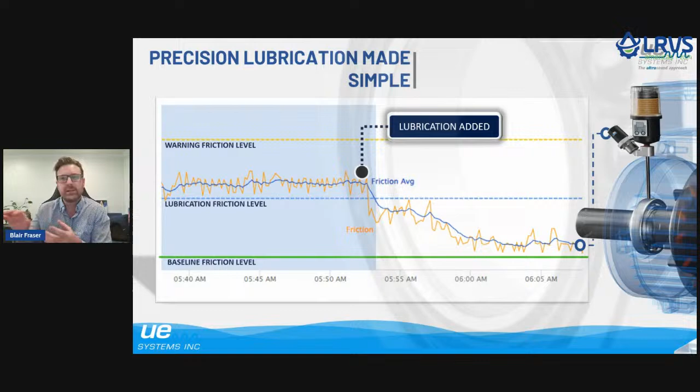Can you imagine having your important, essential and critical assets being monitored by a grease expert 24/7? It's looking for that, saying hey, you need grease. It could be the middle of the night, but you say I just greased 2 days ago. Well, you actually have a defect, so you need more grease more frequently. The system is going to do that for you and apply grease.

So what does success look like? This is our older platform, but we've had autonomous condition-based lubrication out for, well, we're getting 3 years now. One of the things about technology and evolution is being able to learn.

We've seen good bearings being lubricated, bad bearings being lubricated, bearings with defects being lubricated. Specifically after the pandemic, I'm not sure what drove this, but the number of counterfeit bearings, particularly outside of North America, is staggering. How do we know? Because the friction level is off the charts right from installation. Unfortunately, we have seen a number of counterfeit bearings get to market and get installed into equipment.

So what you're going to see here is the friction value. That green line is the baseline. This is ideal friction, not necessarily the bottom of the Stribeck curve. We do go a little bit to the right, facing the hydrodynamic, but not quite that far over. What you're seeing here is that friction level rise. Why is it so choppy? Because the bearings are choppy. Even the healthiest bearing is going to have peaks and valleys within its friction, but from a very minimal point of view.

So this is a great example of that friction level going up. This blue line is when it needs lubrication. How simple is that? The system kicks in and starts to lubricate. What we start to see is that friction level drop, just like we saw that gentleman apply grease and the Ultraprobe show that friction level drop. This does it automatically. What we can see here is, when I took the screenshot, it was 4 days ago.

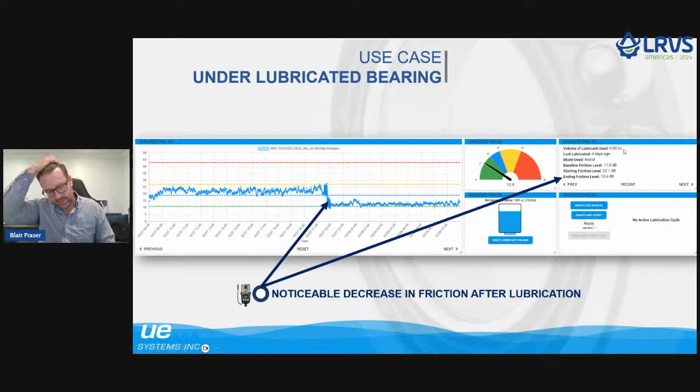Can we get some of that information? Can I look at this bearing? How much grease am I using? Can I predict how much grease I'm going to use? So absolutely, it used 9 cc, around 9 grams of grease, which is very minimal.

As we look for it, what we've seen is we have learned so much over 50 billion data points, thousands of sensors out there streaming friction, lubricating autonomously. We've seen things, and this was an example done in a lab where we started to see micro explosions happening within a bearing. We applied a grease gun, in this case, just a little bit of grease to see what would happen, and we noticed right away that it went nice and quiet.

So as we're still building on this technology, we're taking from those 50 billion data points and learning to see, can we further optimize? Can we predict when lubrication is required, and can we fully optimize the lubrication schedule?

Some of you may have slow moving bearings, and this has always been a challenge, particularly with condition monitoring, because vibration is a pitfall for slow moving equipment. Traditionally, slow moving has to do with the pitch and things like that, not just the speed, but generally we like to think about around 100 RPMs or less. You need a new approach to the lubrication.

This was a great case study of 1.8 RPM. Do not go to a bagel factory when you're hungry, it smells so delicious. Bagels are coming through and getting baked.

1.8 RPM bearing, it's one you have to put a chalk line on to make sure this thing is still moving. You can see, even at that slow speed, with the sensitivity of the sensor, a drop when grease was added, 0.33 cc's. That's typically what you wipe off the end of a grease gun. That small amount of grease made that much impact on the friction trend.

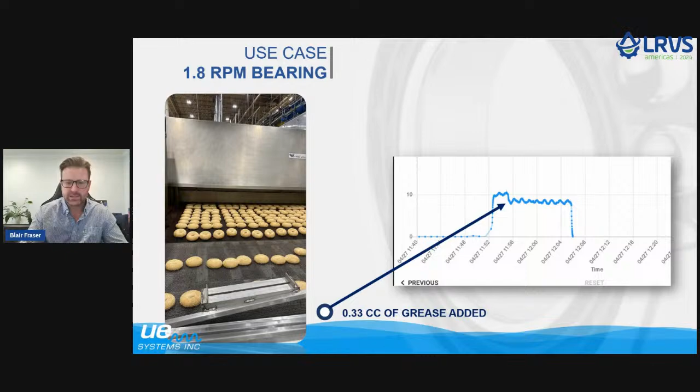Oh yeah, definitely, and I agree, it's never a good idea to go into a food factory when you're hungry, especially when doing condition monitoring. Or you can change your job to quality assurance there and just say, you know what, I'm here for quality assurance. That's right, let me just test it.

We had one question from Peter, asking about those micro explosions and if those were asperity contact events. The answer is yes, and there's actually a research paper behind it. I don't own the paper, we supplied the technology, and it's leading into something great. I'm going to talk to the author, and Peter, if he's willing, I'll get you in touch to answer that question, because it's over my head from that aspect. But the short answer is yes.

Okay, good, I like that answer, because a lot of times we see the guys with the grease gun going around saying, yes, let's do more grease. But I'm so glad you highlighted the repercussions of that, and that's something we can all learn from what's going on right now.

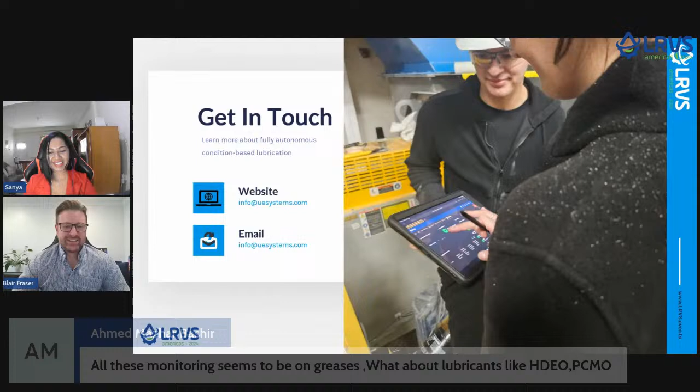Praveen is asking if there's data correlating remaining useful life extension for bearings with condition-based lubrication. Yeah, and quite a bit, and that's something we're compiling over time. Now, where I thought you were going was predicting remaining useful life using AI, which is a separate conversation I can answer. But data to support that condition-based lubrication will extend bearing life or get to the L10 life.

Absolutely, we have a number of case studies on that. The proposition we really see value in is threefold. One, you will see a reduction. If you weren't lubricating at all and have to start using grease, you will use more. But for 99%, we're talking about a reduction in grease consumed — frequency may increase, but the quantity will be less.

Two is the remaining useful life — getting your bearings to prevent downtime and reach their design life. The third, and often most valuable, is the resource time people get back, because they don't have to go out and manually lubricate. You still may have to get work orders, but you don't have to get the right grease gun. The ability to cross-contaminate grease — oops, I put the wrong grease in — is eliminated. So that resource time is something we didn't realize is probably the biggest driver.

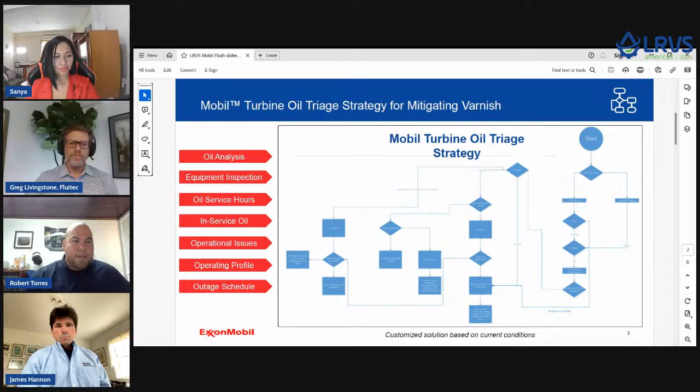Yeah, I think one major factor in determination of flushing, or even as James had mentioned, varnish, MPC and UC value tests - keep in mind that oil is going to be real happy when it's running at optimum temperature. So when it's running through your system and maintaining temp the entire time, people really fail to understand that when that temp comes down on shutdown, varnish is going to be a real mess. It's going to adversely change things when you go to start back up. Those things have to be assessed, not just at running temp. And the data is going to really support all these movements and corrective changes for maintenance. So the MPC and UC values are great data, but it'd be nice to pull those at different timetables throughout the shutdown, so you can have a better understanding and put yourself in the best possible situation to succeed.

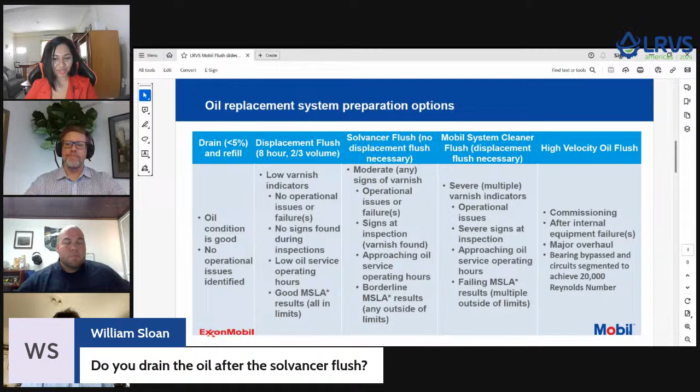I'll offer that on certain turbines, in particular the GE Frame 7 FAs - there are so many of these turbines in the market in US and Canada, and we've gotten a lot of skill at the conversions. One element we talk about is the 19 low point drains on a GE Frame 7 FA. You go to all these low points, and it's a conversation with the customer - do you feel comfortable breaking this flange right here, putting a 5-gallon bucket? That helps because it's beneficial to get the residual oil out as best you can without also being practical about it. Those 19 low point drains, we could talk about that in detail later, and the use of a shop vac in different areas where you're pulling a vacuum, using squeegees. Maybe you've got confined space entry with people in the tanks doing hand wiping. A lot of that is dependent upon your schedule and also your concern about severity of the previous oil. So there's some decision making in advance. And even as Robert pointed out, once you get into that reservoir, maybe you're making a game day decision because things are a lot worse than you thought, and we better do X. That's why you bring in companies that have a good track record and a long history of understanding what option A, B, and C might be.

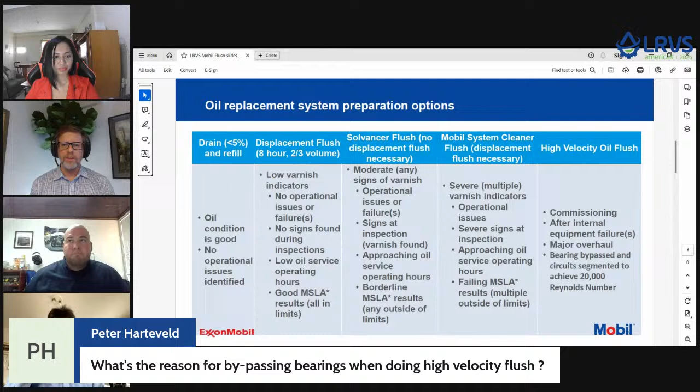I was going to say that you also need the high velocity. By jumpering the bearings, the velocities you're looking at are like 4 times nominal velocity, or a Reynolds number of 20,000. So jumping that bearing helps improve that velocity. The other thing is we can put what they call flushing blocks on the hydraulic system as a way of flushing it. You basically pull off the servo valve and put a flushing block on. It's about the size of a deck of cards, and it allows for high velocities through the hydraulic system.

Nice, that's an excellent point. One other additional contributing factor when you're executing a flush is you have to have heat. A lot of customers ask, can we execute this just by shooting a high velocity of oil through the system? Really, the heat is the contributor - that's when the pipes start being receptive and the oil starts performing the way it's supposed to. A lot of that debris, along with that Reynolds number, making sure the inner pipe diameter is completely filled - there are a lot of key factors into it.

That's why you really want to choose carefully who is going to be touching your equipment, how they're going to be touching it, going over a sequence of events, possible failures, and critical component points to assess whether it's a complete job. It's got to be from A to Z, making sure the most amount of pipes are flushed, and making sure your filter chambers are empty when you do so, because your filter chambers might start catching some of those contaminants, and you really want those measured on a 100 mesh screen at the end of the day.

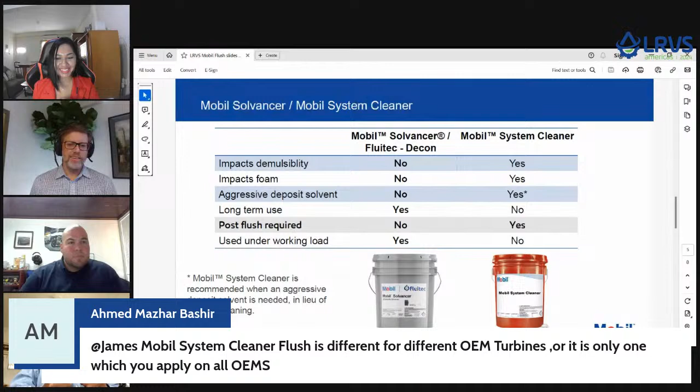So we really recommend this primarily only when needed, let's say. And so for years, this was the only hammer we had. But now, they say when all you have is a hammer, everything looks like a nail. So that's where we were for years - we would always just use Mobil System Cleaner.

So it's very good when needed. And there's a lot of times when it's not, because that level of cleaning isn't needed - the big negative on it is it will hurt the demulsibility of the following charge. So we try not to, especially in steam turbines where demulsibility is a key characteristic, we try not to have to use that Mobil System Cleaner.

But sometimes there are times where that system is so fouled that we're convinced a Mobil Solvancer flush isn't going to get the job done, and the customer knows that - okay, I am willing to sacrifice the demulsibility.

We do feel comfortable that if we get the Mobil System Cleaner down to 0.1% - so it goes in at, let's say, 7%, you've got to get it down to 0.1% - that's a very, very thorough displacement flush. And if you do that, then you're going to be in good shape.

But the trick is, you may have plans and you think you can get to 0.1%, and at the end of the day - I mentioned like the 19 low point drains, maybe there were 21 and we missed some spots - and now we've hurt ourselves.

So anyway, I would say by and large, the Mobil System Cleaner is good on gas turbines. The other thing is, you don't want to run continuously with it, kind of like our chart here shows. We don't want to use that Mobil System Cleaner under operation - it's going to oxidize the oil prematurely.

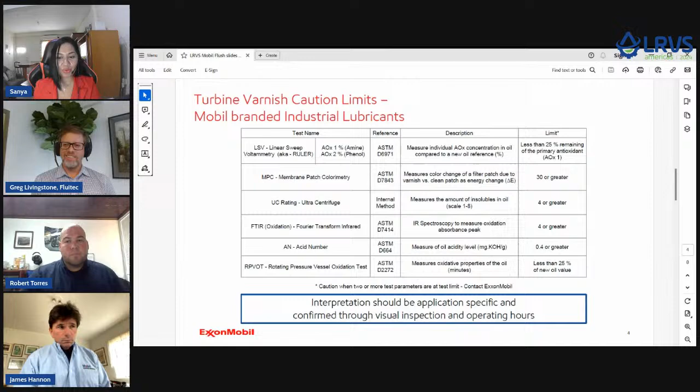Good point, very good point. I have two quick questions. One from Patrick, and he's asking about, have you had success with removing varnish from coolers with the MS Cleaner Flush?

Yes, but oftentimes, as Greg was pointing out, Robert too, when the oil gets cold, the products of oxidation come out of solution and really bind to the tubes. Sometimes you give it a shot with a cleaner and see how well it does, and then it's very easy to tell because you've got delta T changing temperature and delta P, so you can see if you've done a good job or not. Sometimes you give it a shot with the Mobil System Cleaner, which is more aggressive. We've been successful, but there's been times where it was so foul that wasn't going to get the job done, and now you're into the mechanical, using a drill type device to actually etch out the deposits on a manual basis.

Oh boy, that does not sound very pretty.

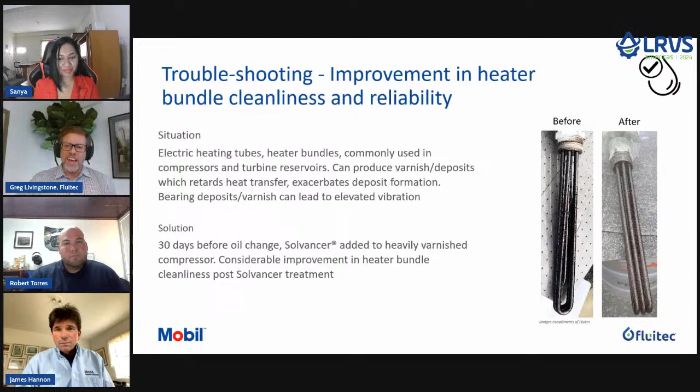But moving on, we have another question. Let me put a slide up. I just wanted to show this for a moment—there are, in fact, cases where we've added Mobil Solvancer to a system. We don't have a lot of customers that put a dirty heater cooler bundle back into the oil typically, but in this case, this was a compressor, and they wanted to measure what Mobil Solvancer would do. So this is before and 30 days after having Mobil Solvancer in the product. You can see, as Jim said, this is not pristine shiny metal, but a lot of the deposits have been removed. I just wanted to make the point that it can be successful at removing some of these deposits.

That's a really good slide, a picture says 1,000 words. But jumping into this comment from Thanaraj, who is joining us from Singapore—it's almost 1 a.m. on his side.

What is the main flushing fluid used? It's a bit of a loaded question, so let's start with that part first. I'll offer that we always recommend the same quality as the final fill oil—that's where you start. Certain OEMs are adamant about that; it must be, in particular, like MHI says you cannot use anything other than the same quality of the final fill product. That's all well and good, and that's your optimum recommendation. But customers will look at the budget side of things, the economic side of things. They say, could I go with something less expensive? And the answer is yes. Then there are different ideas—you could go with a pure base oil. We have products we sell that are actually pure base oil, like our heat transfer oils. We have a product like Mobiltherm 603 that is just a pure base oil, or other suppliers have pure base oils too. That is a way to reduce your cost, using a pure base oil. We get nervous about certain combinations, because we know that when two oils come together, there can be an additive interaction, especially with the antioxidants, and they can fight each other. As long as we understand this oil and this oil are well known together, there are no issues. But sometimes another oil meeting up with the final fill oil can be problematic on the final charge.